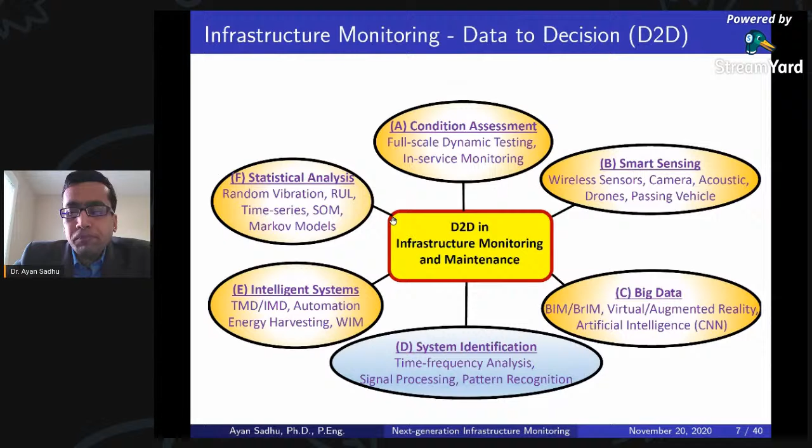So with this research background, let me quickly introduce you to structural health monitoring. Especially for students, like undergraduate students, I think this slide tells you what this buzzword structural health monitoring means. Recently we have seen a lot of failures in different structures.

For example, Nipigon Bridge, this is actually a new bridge that was built in 2016 in Ontario. Immediately after the construction of this bridge, there was some failure, and it was stopped for the public, and then it was reopened.

Then there is another example here, which is in Alberta. There was a significant flood, and there was a failure in the foundations. And you can see there are other failures in some of the bridges in the US because of natural disasters.

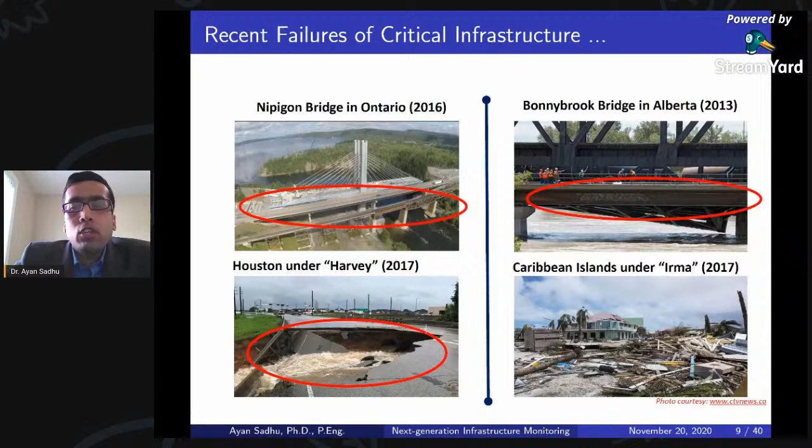And these are not the only examples. There are numerous catastrophic failures worldwide, as you can see, this is an apartment tower failure in China. Then there is a bridge failure in the US, dams and mine failures. These kinds of failures are primarily due to natural disasters or structural aging. It may also be due to deferred maintenance or faulty construction.

Now, if you look at America's GPA, this is the same as your report card. Every year, or every 2 or 3 years, America's infrastructures are inspected, and we come up with some sort of ratings like the report card you have at the end of every semester.

So we say, what's the status? As per ASCE, the American Society of Civil Engineers, as per their report card in 2017, America's GPA is D+. So you may notice that we are not doing well. Our infrastructure has a rating of just D+, which is not good.

Same kind of observation we also found in the Canadian context. For example, CSCE, the Canadian Society of Civil Engineers, as per their 2019 report card, clearly stated it's a good idea to pay a penny now rather than spending a dollar later. So both convey the same message: infrastructure-wise we are not doing well and we need to improve that process. Fortunately, structural health monitoring gives a powerful solution to this problem.

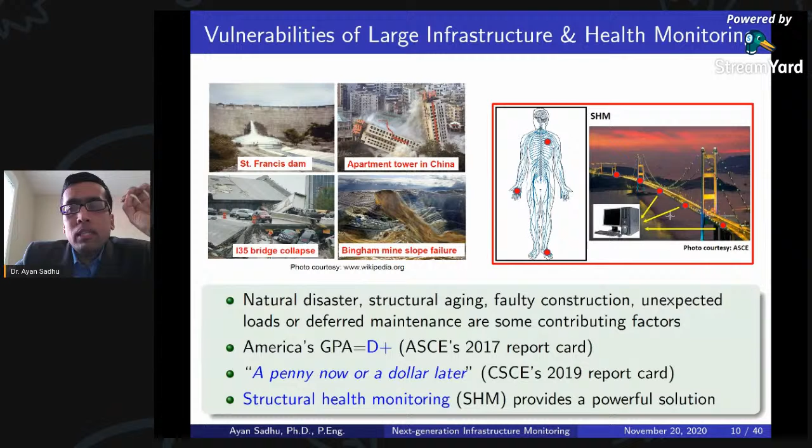Now let's see what are the components of structural health monitoring. First is data acquisition, where we put a lot of sensors. We need to come up with the ideal location of the sensors. We cannot just randomly put sensors in different locations—that's not possible. Also, there's data fusion.

Sometimes we use sensors like accelerometers, sometimes strain gauges or displacement meters like LVDTs. We need to come up with the proper combination of sensors to get the best quality data. Another important thing is we need to collect data remotely, because sometimes it's not possible to manually put sensors and collect data for days or weeks. So sometimes we need to do that remotely as well—there are a lot of challenges.

Once we get the data, the next step is system identification. System identification means identifying the hidden information about the structure from the collected data. This involves some sort of signal processing.

Once we know the system information, the next step is damage assessment. This is where we try to find out the location of the damage or the severity of the damage. Sometimes there's damage, but that doesn't mean we need repair—the damage could be very minor, so we can leave it or make future decisions. That's our last step: deciding whether to inspect, rehabilitate, or maintain.

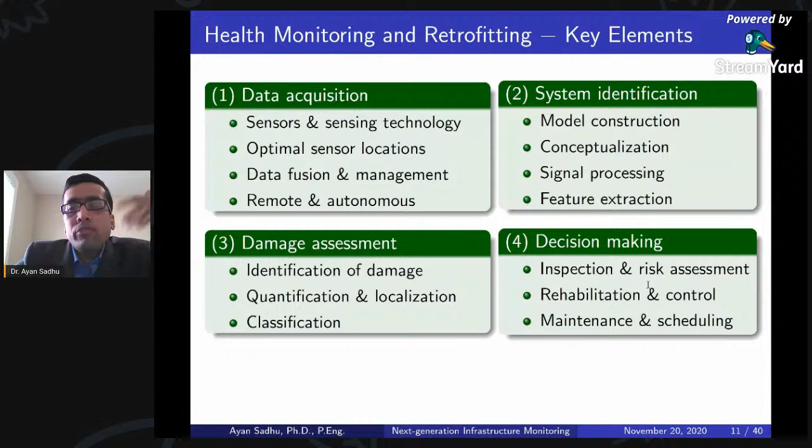In my research, we try to develop different diagnostic or prognostic techniques to improve the existing SHM techniques.

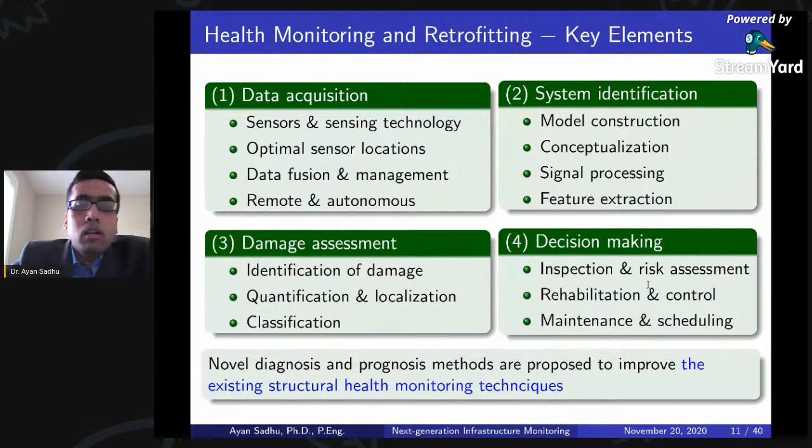So let me show you what actually is meant by system identification. Let's say this is a civil engineering structure—maybe a 3-story building. Let's say this is subjected to some load by wind, earthquakes, or man-made excitations. We can represent this picture using this schematic.

Let's say this is the input, which is wind, earthquakes, or man-made excitation, and then we have the output, which is the response—maybe the acceleration response or displacement response. That's what we know from civil engineering studies: if we apply input, we get output, and that output will contain the measurement we can measure from the structure.

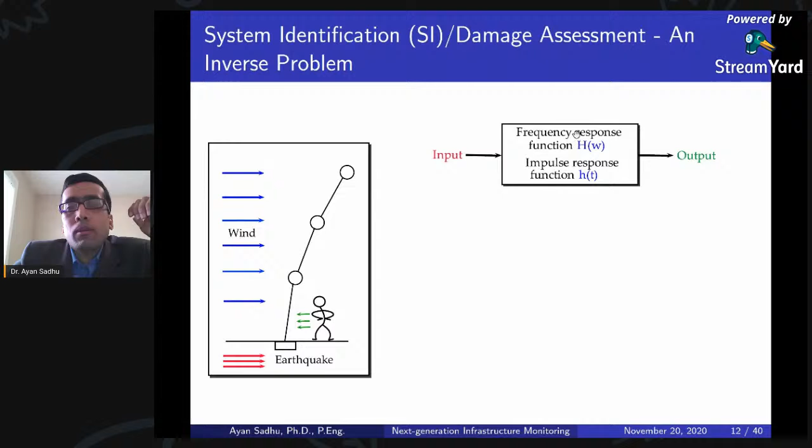Now the question is, can we identify the hidden information, which may be the frequency response functions or impulse response functions? These are important information about the structure. If we identify them from the input or output, we can say what's the condition of the structure, and that's why it is also called an inverse problem.

Why inverse problem? Because here we don't know the structural property—we only have the output, and based on the output we need to go backward and find out that property. That's why it's called an inverse problem, because we are finding the main information about the structure based on the output, not from the input.

Now, what are the advantages? This kind of information is extremely important for diagnostics and prognostics, and also for designing different control devices, for example tuned mass dampers, which I'll talk about in upcoming slides. These are also good for prediction—for example, if you design a new building or bridge, you can use this information to say what the response would be under hurricanes or tornadoes, so you can make those kinds of decisions. That's why these are very important.

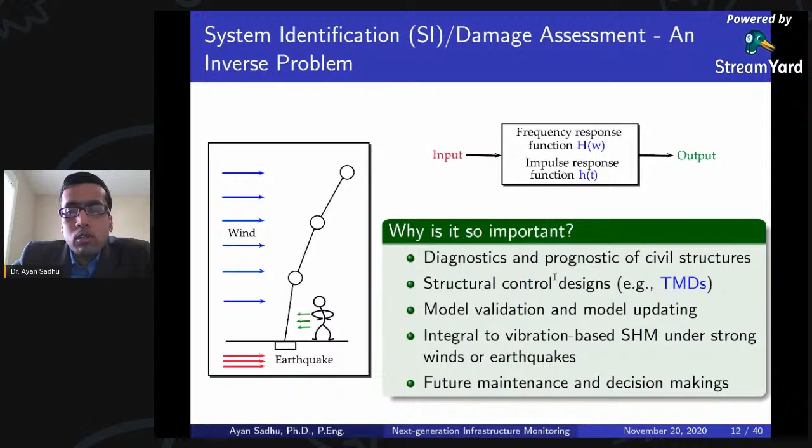But there are many challenges because structural health monitoring is not new. There has been development for the last few decades, but there are still many challenges.

For example, the excitations could be wind, earthquakes, or different man-made excitations. They are actually either narrowband or wideband, so depending on the statistical characteristics, they could be anything. So performing system ID, or system identification, will be a challenge.

Also, these are non-stationary. So when the excitation is non-stationary, there is a significant challenge to perform system ID using traditional methods. Also, when there is damage, our system becomes time varying, so for a time varying system, damage identification is not that simple.

Another common challenge is the limited number of sensors. Because of the cost, the labor cost, or the time required for installing sensors, it is actually huge in terms of cost analysis. So we need to always make sure how we can optimize this instrumentation using a limited number of sensors. That means we are trying to extract information based on few sensors, so that is another challenge.

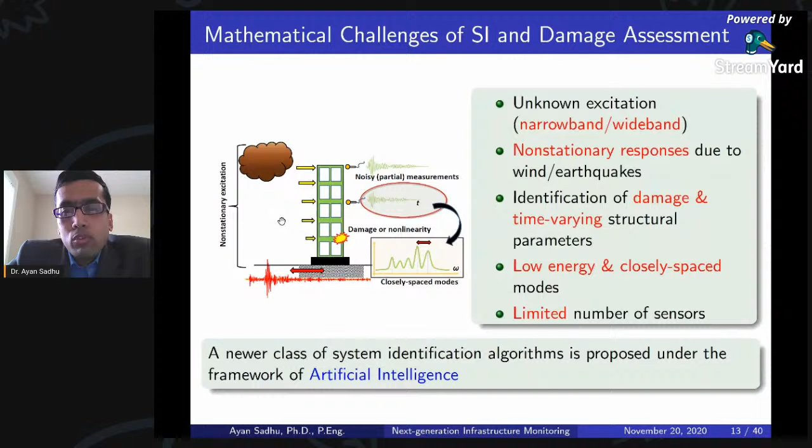In my research, as you will see in the next couple of slides, we developed different artificial intelligence techniques to solve this kind of challenge in a systematic manner.

So let me introduce briefly artificial intelligence. AI is very well known now. It's a buzzword, as probably all of you know, starting from smartphones up to autonomous vehicles. Everywhere we see artificial intelligence. Even in Facebook, YouTube, when you search a video or type something, using this kind of AI technique you can see the best possible search depending on your keywords. So this is very popular nowadays, and there is a lot of development in this area.

Now let's see what is artificial intelligence. Basically, it is something like you are applying human intelligence and automating that into machines, or in computers, such that the computer can do exactly the same way as a human can do. And there are basically two different branches: one is called machine learning, another is called deep learning.

Machine learning is something relatively well developed and established, whereas deep learning has been developed in the last few years. This is very new, and there is significant development in this area nowadays because of computationally efficient computers. Previously it was not possible because we didn't have GPUs or highly capable computers. Nowadays, because of high performance computing and graphic processing units, it's very easy for us to perform this kind of exercise like deep learning.

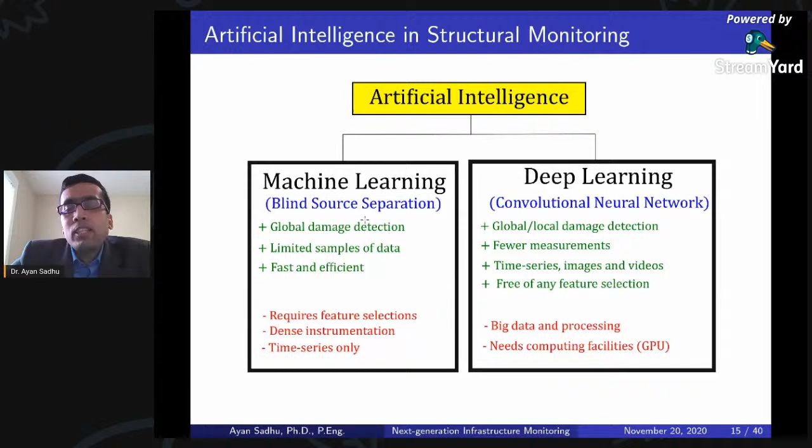Now let's see what does it mean by blind source separation. As I said, machine learning is one sort of pattern recognition method, and in my research, I developed a blind source separation type machine learning technique to perform the system ID.

So what is blind source separation? In simple terms, suppose there were two speakers and two microphones, so each microphone is receiving sounds from these two speakers. The question is, can we separate the individual sound from this microphone data? That is called blind source separation, without knowing anything about the physical mixing. This is why it is called blind - because we don't know anything about A, which is the mixing, but we would still be able to separate the signals.

We basically use different statistical characteristics of the signal, and I'm not going into the details of it. Those who are interested can see my publication that I showed, and that way in future you can develop a good understanding on that.

But let me explain the significance of blind source separation in the context of civil engineering. Think about a bridge - if you want to monitor it, when you collect data, you may expect it will contain responses due to moving traffic, trains passing below the bridge, and different operational conditions. So at the end of the day, whatever data we collect is basically a mix of multiple signals - this is the same as here, where the mic contains a mix of individual signals.

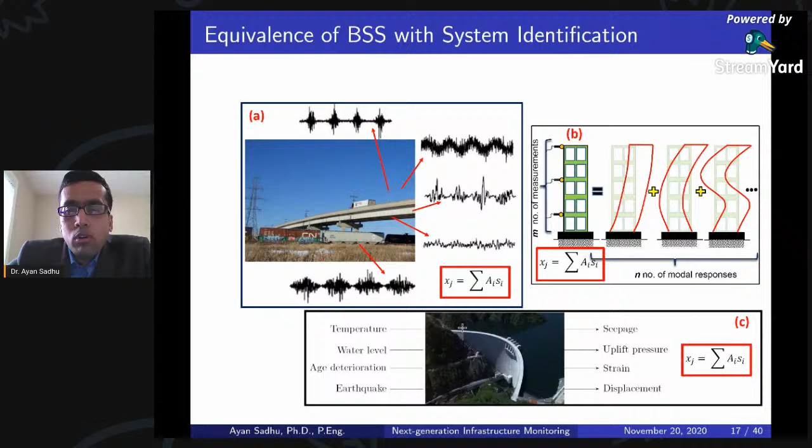So the main problem is basically the same as here, where the measurement contains multiple sources.

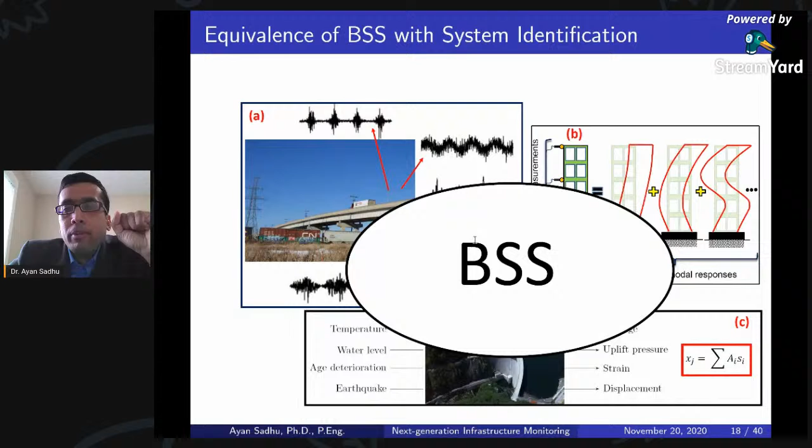So that's why we can use BSS, or blind source separation, to separate the signals and identify the most appropriate one that contains the damage information about the structure. So that's one technique.

Another technique is called convolutional neural network, which is part of deep learning. I'm not going into the details, but simply put, this contains a series of multiple layers for pattern recognition, such that if we give some input, it will identify the features or output at the back end. The advantage here is that for deep learning, we can use either time series, images, or videos, which is one advantage for analyzing different deep learning techniques. So in my research, I used blind source separation or CNN for structural damage assessment.

Without further background, let me move into some of the methodologies we've developed so far. As you know, there's been significant development in sensing technology. For example, 10 years ago people used sensors like accelerometers installed in a bridge deck to get measurements, whereas nowadays we're using unmanned ground vehicles, smartphones, drones, or cameras.

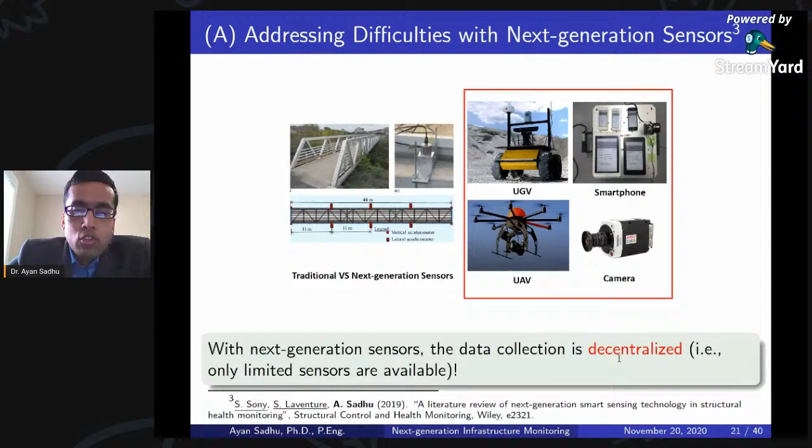In my research, we developed methodologies to identify structural damage using limited sensors, and for that we use the concept of sparsity. Now what does sparsity mean? It's very simple, and I hope this picture will make it clear.

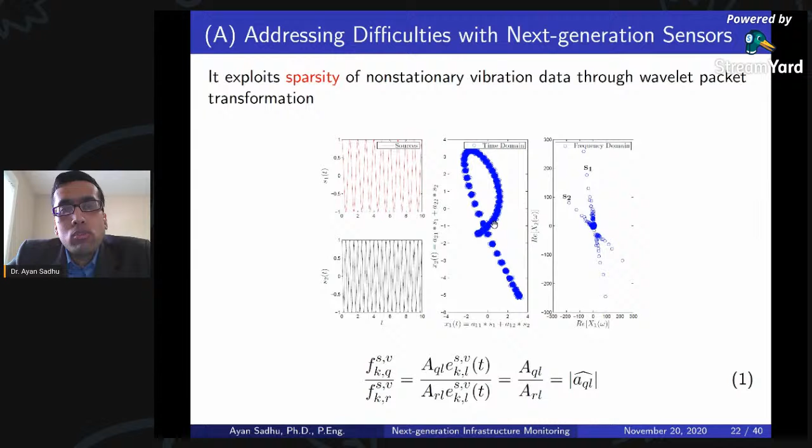So this is called sparsity. What does it mean? It means that if you transform a signal from time domain to frequency domain, we can classify or make two or three different clusters corresponding to the original hidden signal. As soon as we do that, we can say the data contains two or three sine signals and so on. Then if I use inverse frequency domain transformation, we should be able to get back the original signal that we mixed at the beginning. So that's the advantage - we're actually going backward, from the end to the front, solving the backward problem. With this, we're able to find hidden information about the structure, which is very beneficial.

For tall buildings, it is very flexible, right? If you think about your final year course on the stiffness method of structural analysis, you know that if a structure has too much height, it becomes flexible, causing a lot of displacement on top. So if this tall building is too flexible, it will have a lot of deflection on top, which may not be good if you're on the top floor. This is where a single TMD, or tuned mass damper, is actually very popular.

So it is actually installed on the top level of the building, such that if the building moves in this direction, it will move in the opposite direction. And because of the out of phase movement, it will reduce the vibration level. So that's the advantage. This is called control devices.

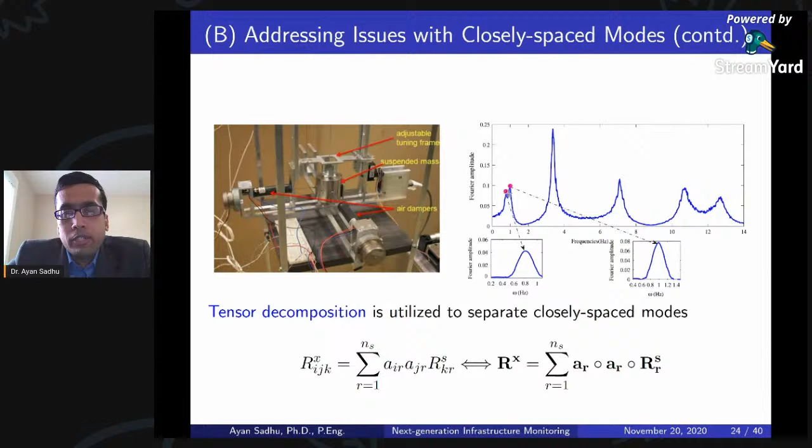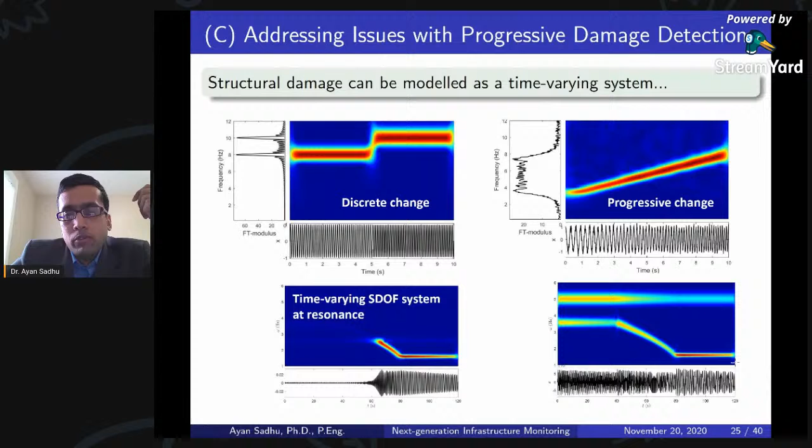Because whenever there is damage, the structure becomes time varying. So for example, here, this signal processing information shows that the frequency is reducing because of the damage, right? So these are a nice way to see what's the progression of the damage.

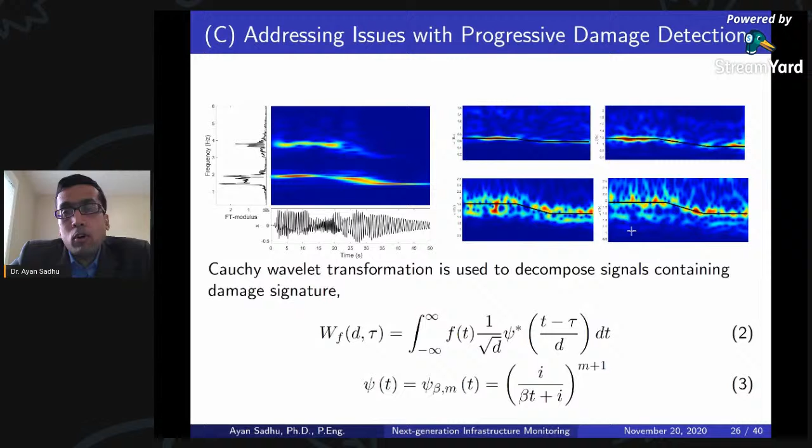So this is another example where we have used a tool like wavelet transform on the data. Here you can see that we have simulated different damages, and based on the data, we applied wavelet transformation, and the proposed method has successfully identified and tracked the decrease in the frequency in the data, which is really nice to see. These are different structural modes, and each of the modes clearly shows a decrease in the frequency, which is not possible in traditional methods.

Now, so far we talked about damages, but cracks are another important parameter for damage evaluation. If we don't detect cracks at the early stages, because of the crack, there may be leakage of moisture, and because of that we may see corrosion, right? So we should not just look at the big damages in structures, we should also look at the minor damages like cracks.

And the machine learning methods that I have presented so far are good for identifying the bigger, larger damages, but they are not suitable for minor damages. That's why I need to rely on deep learning techniques or convolutional neural networks, as I briefly mentioned before. So this is the context of deep learning techniques where we are successful in identifying the minor cracks.

This slide shows a sample masonry wall where the damages or cracks are simulated during the test, and we have developed convolutional neural network based approaches. This is a typical network that we developed, and based on that we have been successful in identifying the cracks automatically. This is a totally automated process. We collect a lot of images that contain cracks or no cracks, then we train the model using the proposed configuration of CNN, and then we try to identify the actual cracks in the new or test datasets.

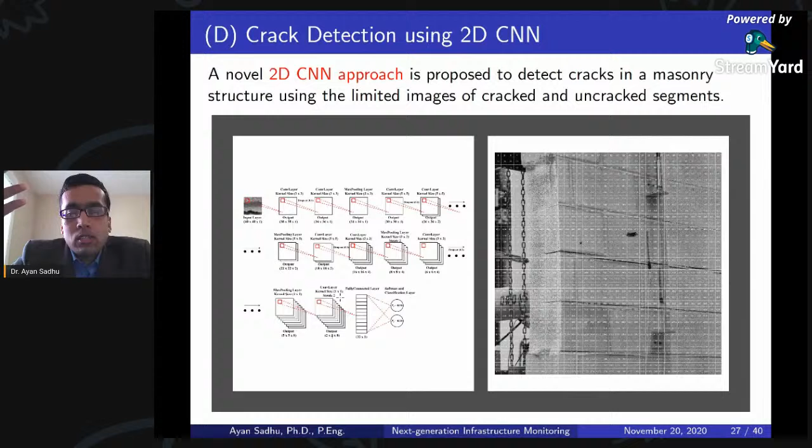Now, when there are images, that is relatively easier because from the camera we can get images and videos. But getting a large amount of images is not that easy. If you want to identify cracks in pavements or potholes, you need a lot of images because the deep learning algorithm needs a lot of data. If you have very few images, like 50 or 100, that may not work. You may need 5,000 or 10,000 images for proper training before you can go for testing.

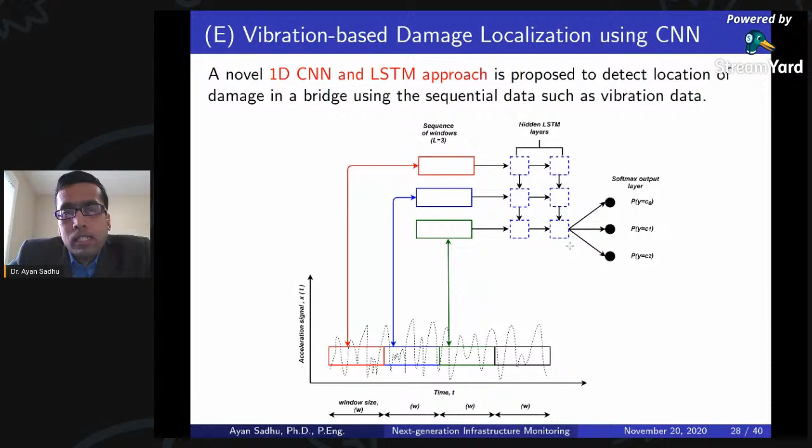So to eliminate that problem, recently we came across vibration-based damage localization using an advanced technique like 1D CNN. Here, instead of using images, I'm using vibration data. This vibration data is discretized into multiple windows, and we developed a deep learning technique for identifying localized damages from the vibration data. That's another way we solve this problem.

So for example, these are some of the results. This is a bridge in Switzerland, and this is actually one of the benchmark datasets available online. We considered two different cases: in one case we have 20 millimeters of pier settlement, and in another case we have 90 millimeters of pier settlement.

Here the y-axis is basically the indicator. As you can see, when we have the pier settlement, the indicator shows that these exceeded the threshold, whereas this is the data for the undamaged pier. For the undamaged piers, the indicators are well below the threshold, meaning this pier is not damaged. So this is a simple way to show the advantage of this kind of automated process, because we can clearly separate damaged or undamaged structures.

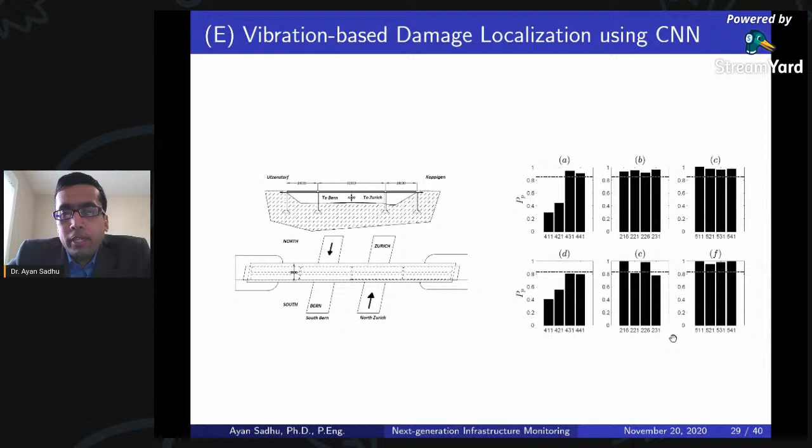This is another way we can show the advantage of SHM. In this research, we developed computer models to have a connection between the actual structure and the computer models, such that we can connect them using building information modeling.

So this is called bridge information modeling. Let's say this is the actual sensor located in the bridge, and then we have a computer model where we simulated the virtual sensor. This is like an online kind of thing. Once we collect the data, we connect that data with this virtual sensor. The advantage is, in future, if you want to see how this bridge is doing, you can just click on it and see the condition of the entire bridge online.

This kind of tool is extremely beneficial because it gives nice visualization. If you put a sensor, you'll get a lot of data, and without this visualization, bridge owners may not feel comfortable using the data we collected. This kind of visualization helps provide a lot of information about the condition of the structure at different stages of its life.

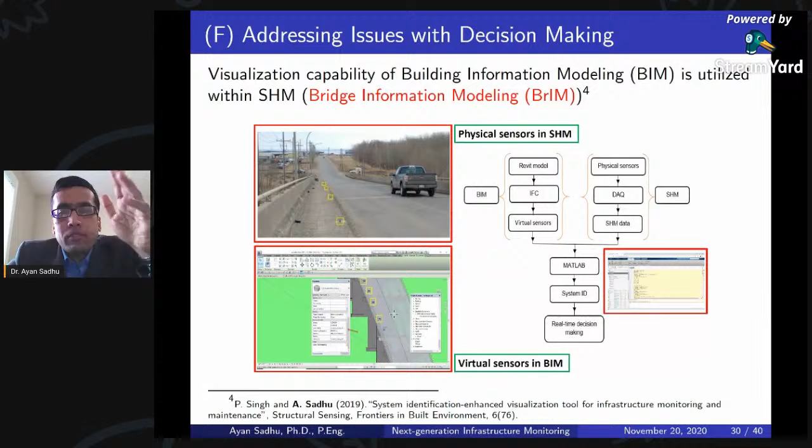Okay, so with that, I'll quickly go through some full-scale studies we've done, followed by the summary. These are some examples we have implemented. For example, this is the airport control tower in Toronto Airport.

We implemented our algorithm for the tuned mass damper that I discussed a few slides ago. This is basically a tuned mass damper we came up with, and it was successfully designed using the proposed algorithm, which was installed in this control tower in Toronto Airport.

We implemented our algorithms in different bridges across the world. For example, this one is in Montreal. This bridge is located in Germany. This one is in Ireland. In these bridges, we implemented our algorithms to monitor them and identify the damages.

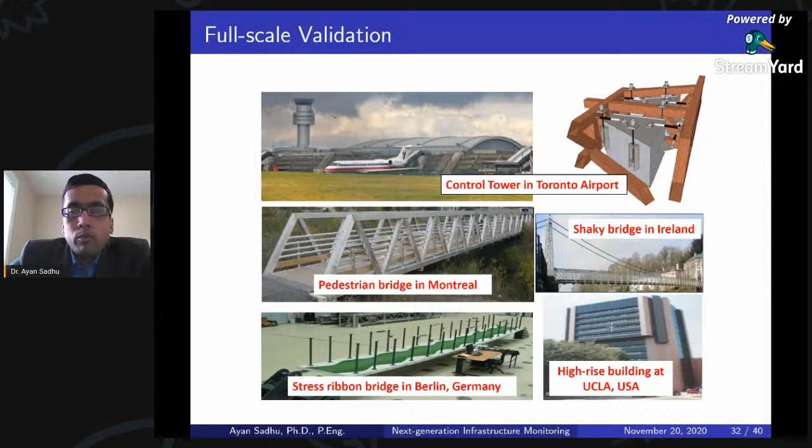This is one of the high-rise buildings in UCLA, in the US, which we used to check our algorithm with limited sensors. This is one of the bridges in Thunder Bay that we monitored, where we performed the serviceability assessment using the proposed algorithm based on machine learning and deep learning.

This is one of the nice full-scale studies at the experimental level, where we show how we can control the vibration of structures, and also how we can store the energy. So if the structure is moving, we can extract that mechanical energy into electrical energy. We did a proof of concept study with this work.

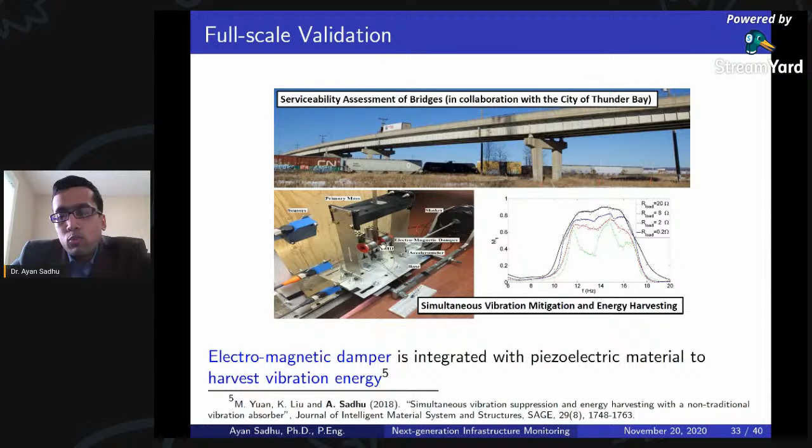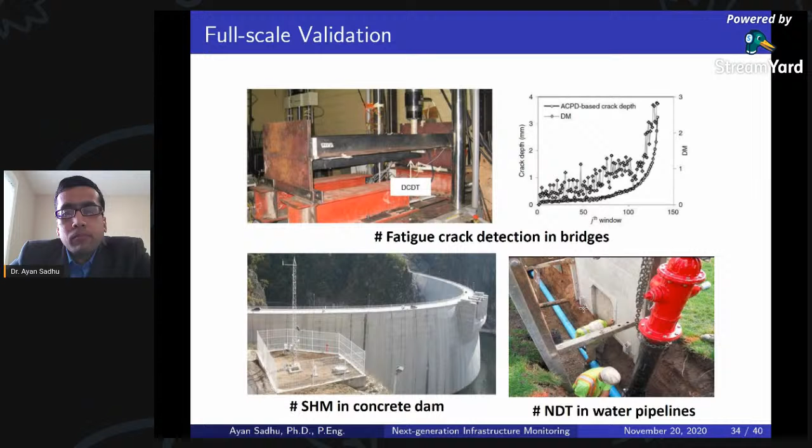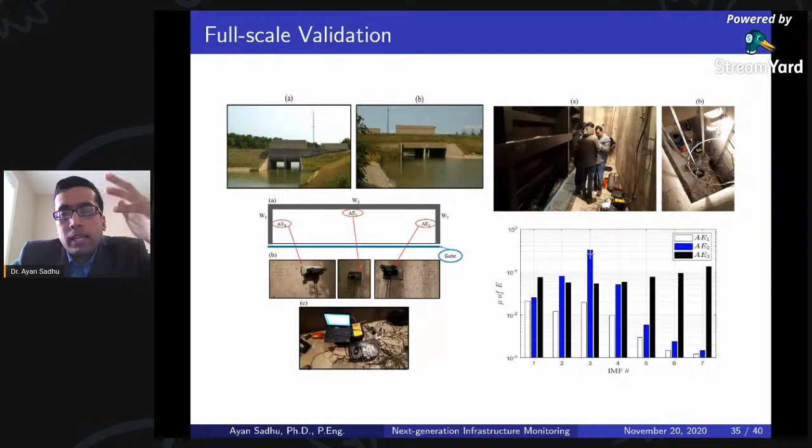This is a dam located close to London, Ontario. Recently we put acoustic emission sensors here, and this is a schematic showing those sensors. They can provide a lot of information about cracks. We put three sensors in the wall of the dam, and it shows very clearly where the damage is. In some locations there were cracks showing high amplitude, and that's how we detected the cracks at different locations. This shows how effective these algorithms are.

So for that we came up with different machine diagnostic techniques. The advantage of this kind of technique is you don't have to limit your expertise only to civil engineering; you can also explore it in mechanical systems as well.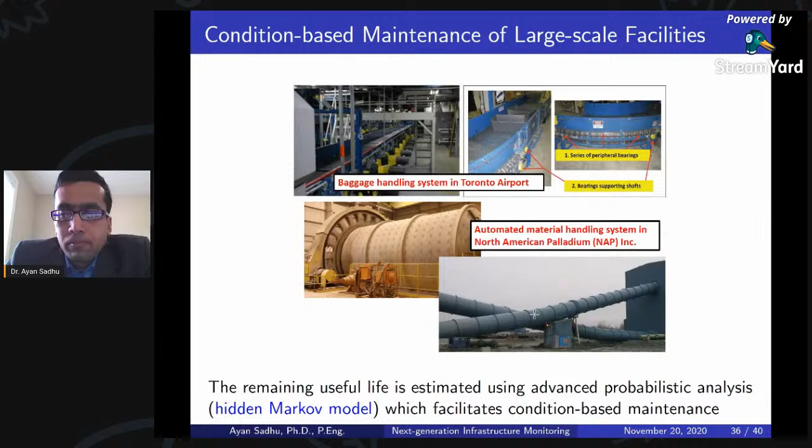So far we've covered the advantages and applications. Let me conclude with some summary. System ID methods are extremely powerful, and my objective in this presentation was to give you a quick idea of what they can do without going into the details, since at the undergraduate level it's really difficult to go into the details of this technique.

Overall, there has been development in signal processing, but still all our applications are civil engineering applications, so students need a deeper understanding of structures and structural analysis and design to implement these algorithms properly. SHM is a multidisciplinary research area involving signal processing, computing, and software development. It's an excellent field of research where you can use the latest technology in the civil engineering domain.

It involves not only analytical studies but also a lot of experiments at full scale. As a future researcher, you don't have to limit yourself to the analytics side. Nowadays we are integrating artificial intelligence and scientific computing, so for students pursuing graduate studies in this area, it will be highly beneficial, because once you graduate there will be a lot of value in this research.